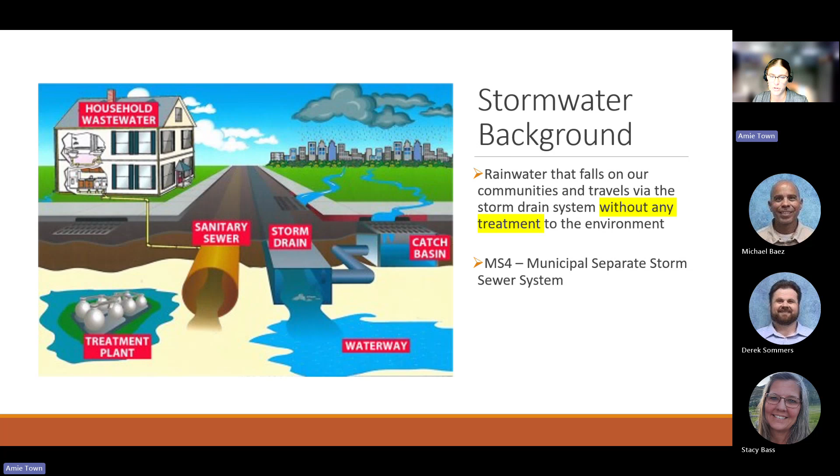The stormwater here in Mesa can flow to a variety of locations, most notably the Salt and Gila rivers, which are protected waters of the United States, which puts a bit more emphasis and regulation behind protecting our stormwater. Numerous endangered and rare species live along these rivers. For example, the Ridgway's rail bird, lowland leopard frog, and the Sonoran desert toad. And there are also agricultural communities downstream that we need to protect.

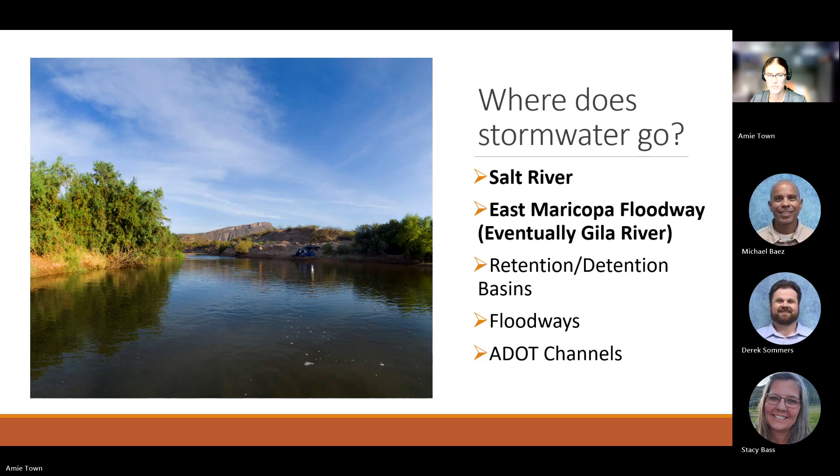There's retention and detention basins, very common in residential neighborhoods and parks, and those are designed to allow stormwater to percolate into the ground, which again creates an avenue where stormwater pollutants can eventually reach the groundwater. There are also floodways and ADOT channels throughout the city where stormwater can flow. So that's why we want to protect the stormwater, but what are we protecting it from? Let's get into the pollutants we commonly see.

Here's a pretty exhaustive list of pollutants that you may interact with or see in your neighborhoods or just out in public on a daily basis, all of which we want to keep out of the stormwater. The automotive and machinery industry has a long history of misusing dry wells as oil disposal drains, particularly in the Central Valley, Phoenix area. Coolants and refrigerants have been found in Mesa neighborhoods, which can easily kill pets and wildlife once discharged. Brake dust and shavings are commonly referenced as the top contributor to lead and copper being found in stormwater.

Trash, litter, dirt, and sediment can cause storm sewer blockages, which in another municipality local to Arizona caused a $1 million cleanup, and that's not something we want to do, so it's important to keep trash, litter, dirt, and sediment out of the system. Pesticides and herbicides are intentional poisons and will kill any aquatic life in the stormwater. Chlorine is a very common pollutant from discharging unneutralized pool water into the streets rather than into your sanitary sewer cleanouts. Fertilizers are typically loaded with nitrogen, which leads to algal blooms and standing bodies of water, and these effectively suffocate the aquatic populations. Paints and solvents will not dilute easily into the stormwater, and those can be difficult to remediate.

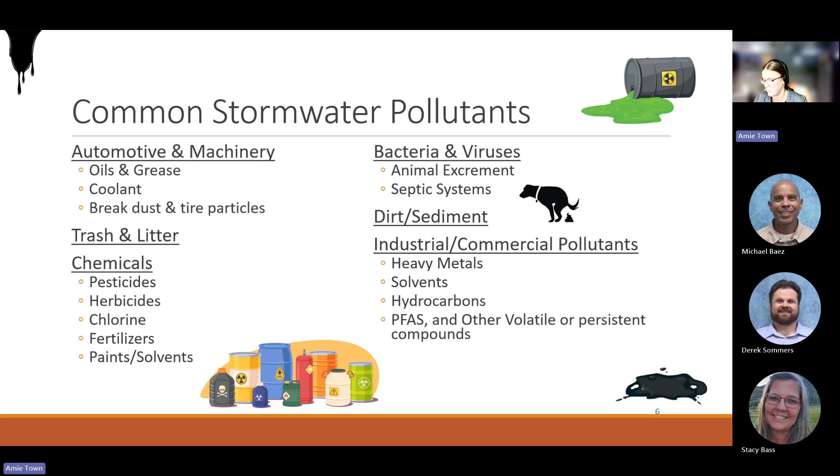Here's a list of where our stormwater pollutants generally come from. We've broken it down into 3 categories: industrial, commercial, and residential. And then there's a general category that everything else kind of falls into. At home in your neighborhood, you might see things like pet waste, yard clippings and chemicals, litter, washout, dumping, and gray water. So you can take a moment and kind of read through all of these pollutant sources.

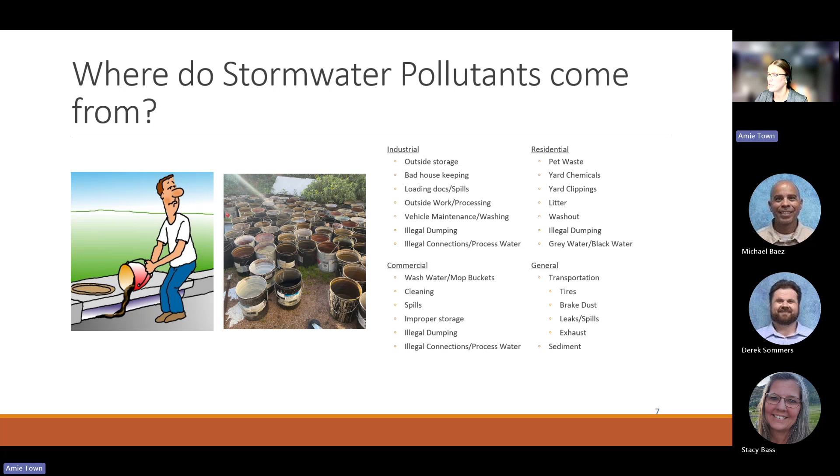The Clean Water Act was the first major federal protection and enacted in 1972. This act mostly regulated industrial discharge pipes that were directly discharging waste and wastewater into rivers, lakes, or surface dumping. While this was a great first step, many revisions and amendments were made, and the amendments made in 1987 introduced regulating stormwater on construction sites, certain industrial sites, and for municipalities.

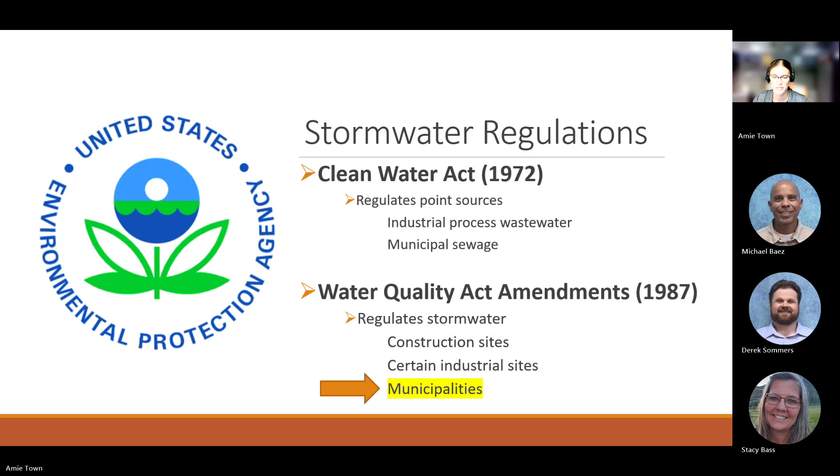Since it's impossible to completely prevent 100% of pollutants from entering stormwater, permits were developed to allow the highest risk areas to discharge so long as they do extra work to minimize the pollutants. This is how we came about having an MS4 permit at the city and maintaining our storm sewer system.

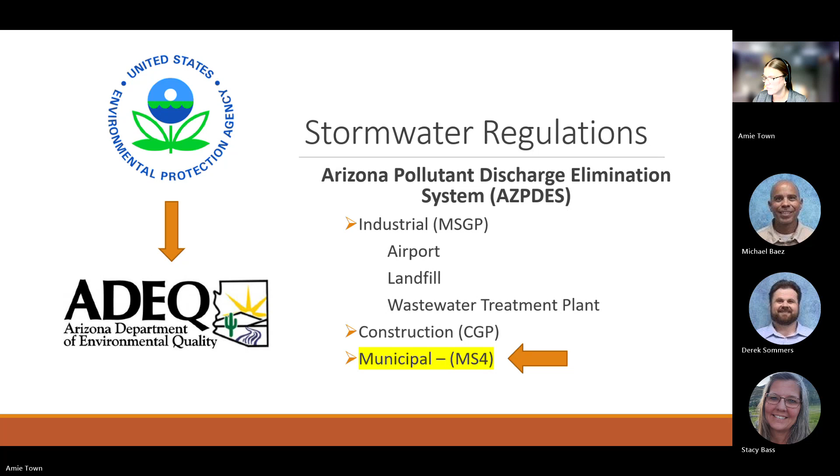There are shorter term permits as well, like the construction general permit for active construction sites greater than an acre in size. There are operating permits like the multi-sector general permit for certain industries requiring additional monitoring and reporting. For example, Falcon Field Airport, which deals with multiple sectors of commerce. Large cities, which include Mesa, have a very robust program that require many different preventative actions.

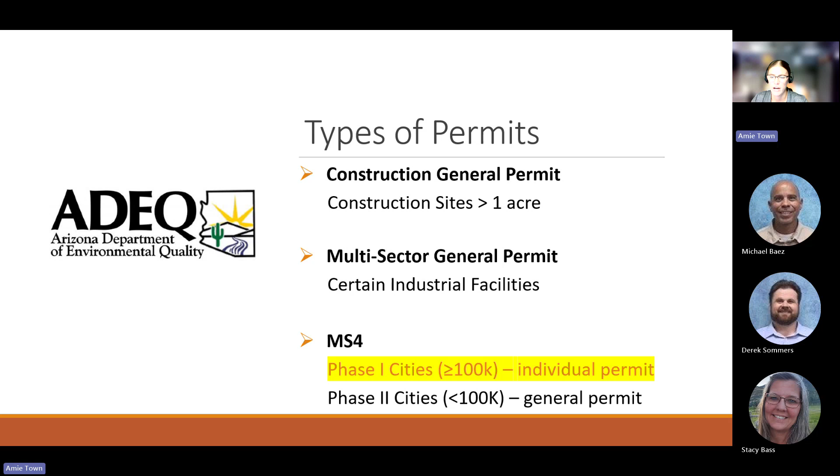MS4 permits are split into 2 categories seen here. Phase 1 cities, which Mesa is an example of, have a population of greater than 100,000. The permits for Phase 1 cities are custom tailored to that city's needs and features, whereas Phase 2 cities with populations of less than 100,000 have a cookie cutter permit that they have to adhere to, and they don't have the opportunity to custom tailor it like Mesa does.

The MS4 permit requires the city to implement many preventative measures, including setting city ordinances, developing system cleaning and maintenance procedures, facility good housekeeping and city employee training, household hazardous waste collection, public education and outreach, industrial and construction inspection programs, illicit discharge investigations, and stormwater monitoring. And most notably, the development of a stormwater management plan, better known as the SWAMP.

Our SWMP requires us to provide citizens opportunities to report complaints, access the SWMP and latest annual report on the city's website, and create opportunities for citizens to participate in stormwater control implementation. These activities may include cleanup events, gutter stenciling, household hazardous waste disposal events, and educational activities.

Many of the outreach and education requirements mandated by our MS4 permit are accomplished through the city's membership in STORM. STORM is an organization made up of many municipalities and government entities within the state. STORM engages in public outreach through both social media and advertising campaigns. They develop and distribute promotional items and educational materials. And they also track and maintain data on the effectiveness of those advertising campaigns. Overall, coordinating with other municipalities like this allows us to better serve both our communities and our neighbors that share our waterways.

Public involvement and participation is another portion of our SWMP, and it's accomplished through several means. We have reporting and tracking tools. I'll post our contact information at the end of this presentation, which you can call or email with complaints. And we have programs designed for tracking complaints and projects.

The Household Hazardous Materials Facility allows for Mesa citizens to responsibly dispose of their potential pollutants for free, as well as recycle usable materials at the swap shop there. If there's still any materials left and it's still able to be used as intended, that's what the swap shop is for, and that can prevent it from becoming another pollution source if it was discarded as landfill waste. Citizens can engage through social media posts, STORM advertising, and live events. And webinars or workshops like this also round out the ways we meet our public involvement and participation requirements.

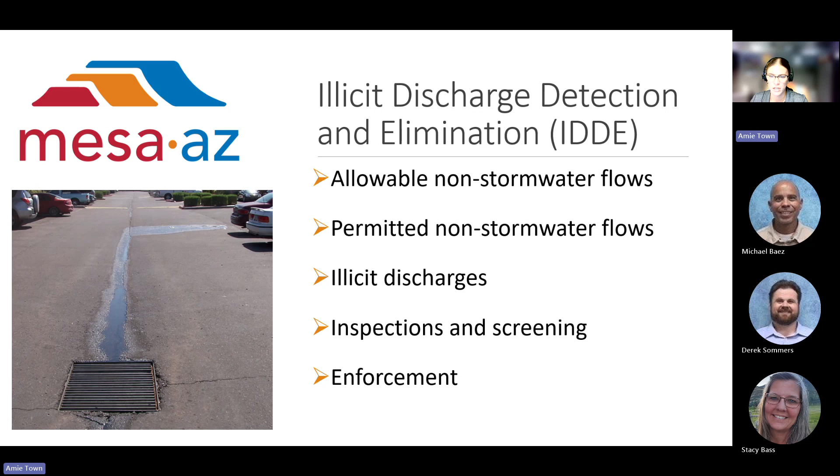Like I mentioned, when conducting these inspections, we expect to see no flow during dry weather screening. However, if a flow is found and can be sampled, a sample is taken to confirm it is an allowable discharge through laboratory analysis, and the site is re-inspected in 24 hours. The city code also lists out all allowable discharges. If you're ever unsure, you can also give us a call, and we would be happy to help.

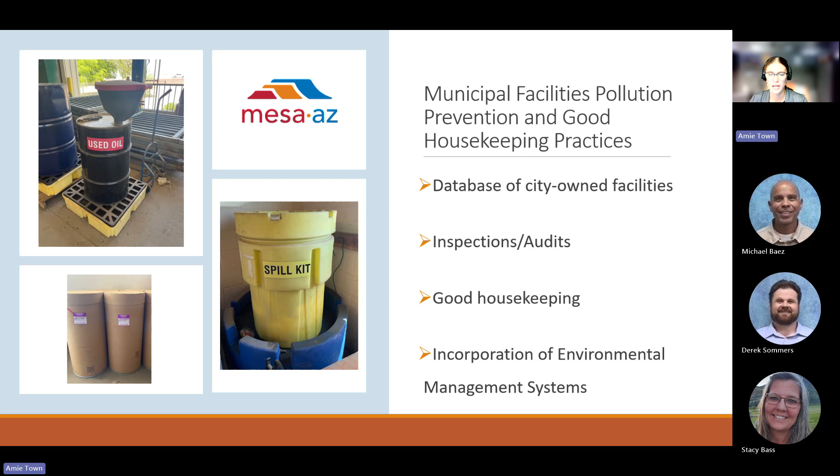Part of our responsibilities include self-inspecting City of Mesa facilities. We keep a record of city-owned facilities and document inspections at least annually for potential stormwater discharge. Some of the things being inspected at these facilities include that containers like drums, cabinets, etc. are closed tightly and only being opened when actively putting materials into the containers. Secondary containment is available as needed. Chemicals are properly separated for reactivity, and all chemicals are properly labeled with labels facing out.

As part of the MS4 permit, the city must also conduct inspections at private industrial and commercial facilities. These inspections must take place at each identified facility once during the 5-year permit term. While on site, our inspectors will review regulatory documents such as their existing stormwater permits, air permits, and stormwater pollution prevention plans. Facilities that don't appear to be meeting their permit requirements are reported as non-filers to ADEQ. These inspections help to resolve and prevent future illicit discharges from taking place within the city.

Construction sites are some of the most inspected by our staff, which take place at least once every 3 to 6 months. Sedimentation pollution can come from vehicle track-out, concrete wash pads, or runoff from material stockpiles. Paints, sealers, coatings, and other wet products are also really common at construction sites and have a high risk of discharging into the storm sewer if spilled or left unattended.

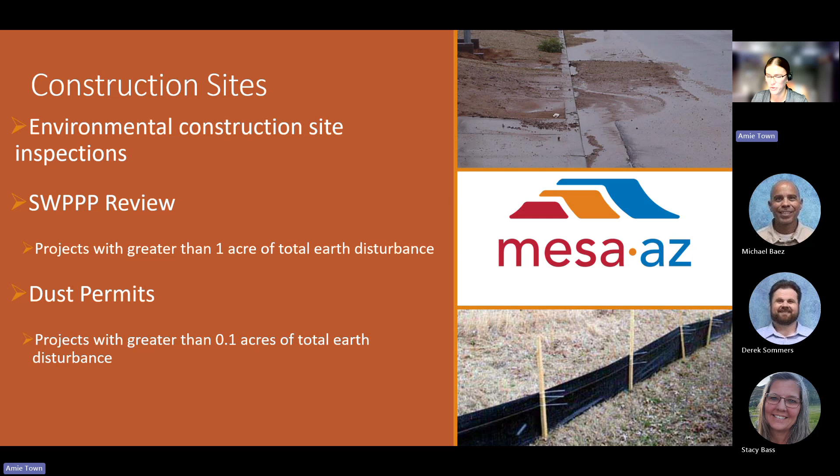A stormwater pollution prevention plan, also known as a SWPPP, is required for construction projects with a total earth disturbance of greater than 1 acre or about 43,000 square feet. All city-owned projects that require a SWPPP must go through a review process with us, the Environmental and Sustainability Department, to ensure all requirements are being met. SWPPPs can tie into dust permits, which could be a whole other workshop itself, but just for reference, projects with greater than 0.1 acre or 4,300 square feet require a dust permit through the county.

Developments are typically required by code compliance to get approval for grading and drainage for on-site retention. Practices as simple as sloping a hill or a sidewalk can have meaningful long-term impact on preventing debris and other pollutants from entering the storm sewer. Having new development standards that require stormwater consideration during both the construction process and the final permanent product is a massive help in preventing and reducing the volume of accidental discharges into the storm sewer for the life of the site. For city facilities, development features like retention basins, valley gutters, and in extremely rare cases, dry wells may be inspected more often than the permit's minimum requirements to ensure they are clean and free of pollutants.

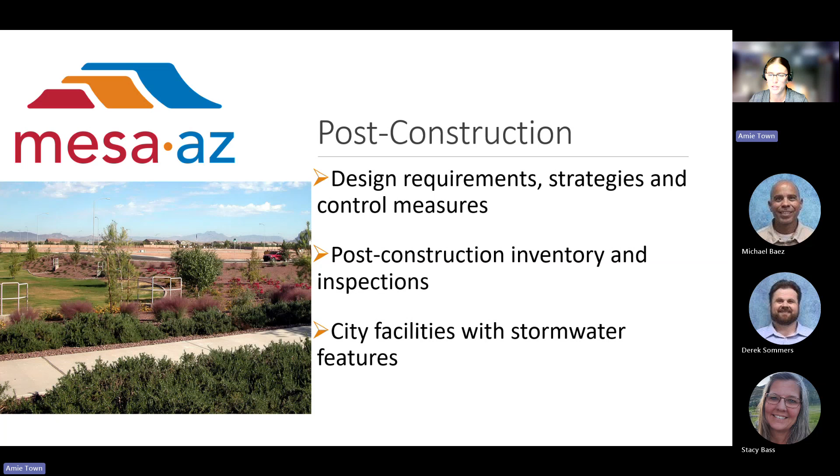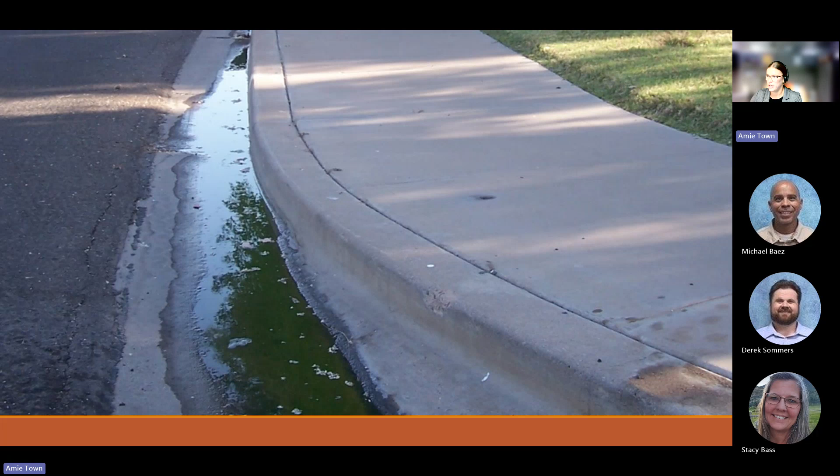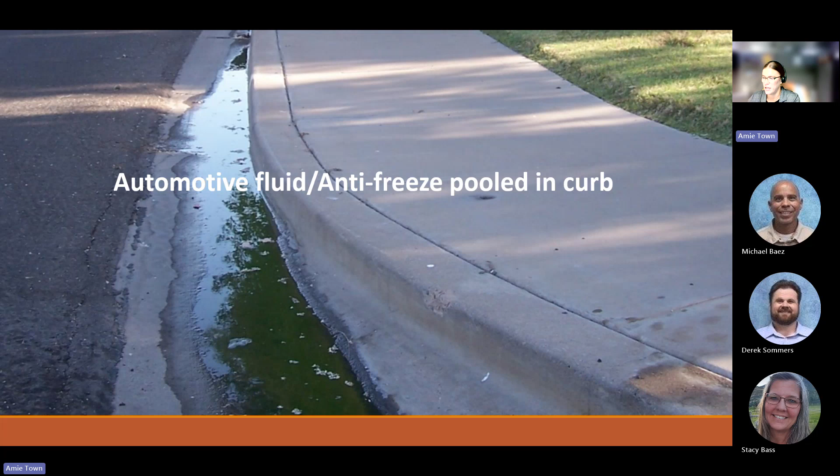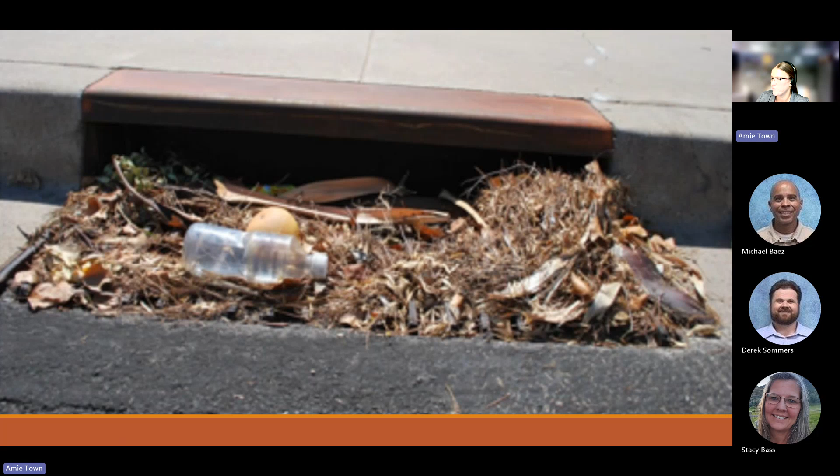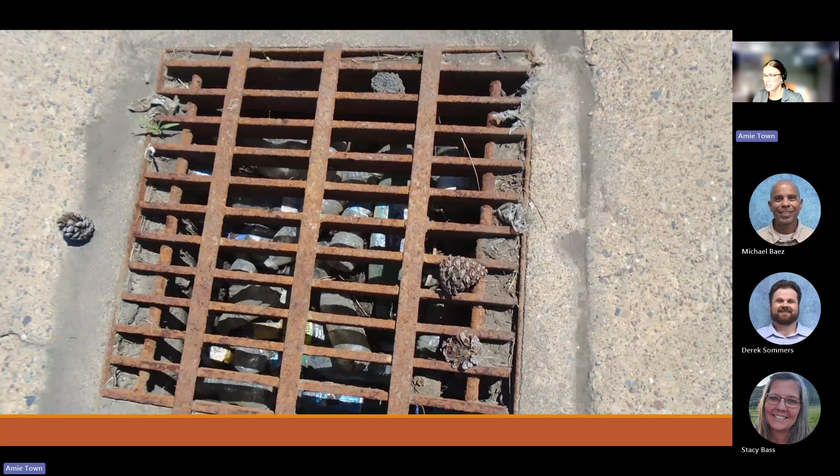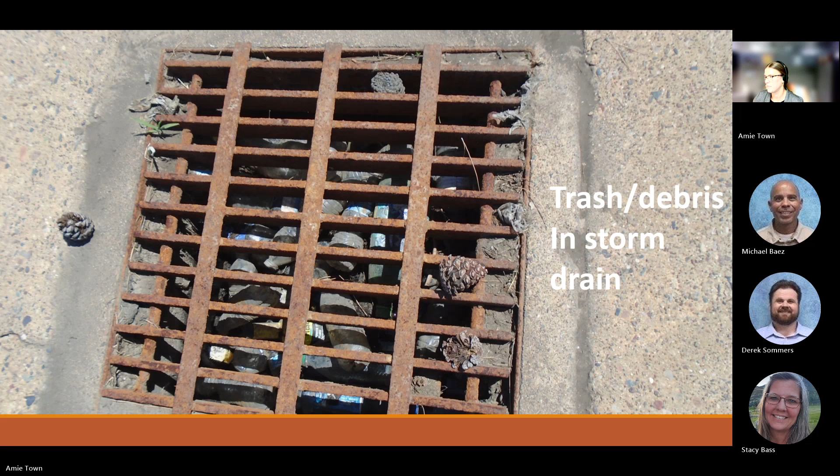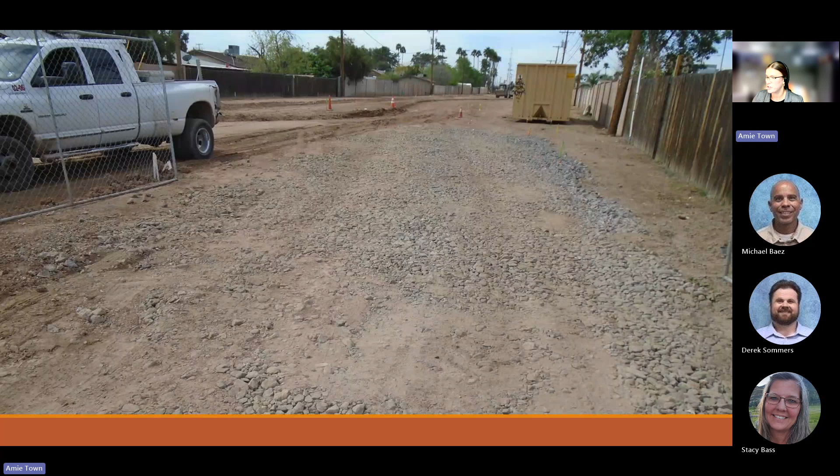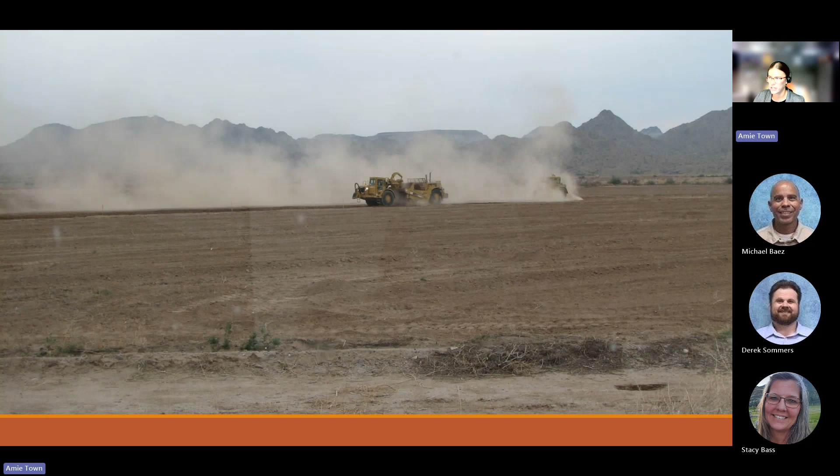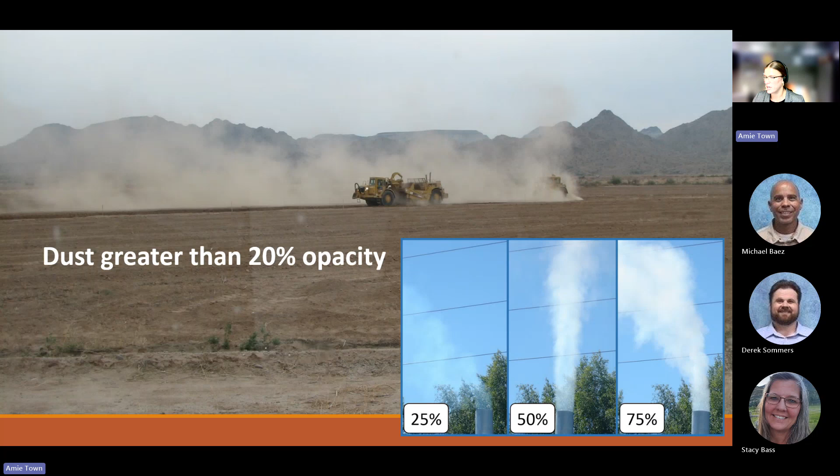And here we're seeing an unmaintained track out pad. Normally these large cobbles are used to knock the sediment off of the vehicle's wheels as they leave a construction site. But here you can see that sediment is kind of caked up on top of that, so it's not going to do anything, and it's going to cause more track out. Here you can see a dust violation. The opacity is greater than 20%, which is what we look for whenever we get a complaint about dust. Everyone in our department here at the city goes through EPA Method 9 training, which teaches us to observe dust in increments of 5% opacity. So we can tell if something is at 20% or if it's at 15%. Here's another example of dust being greater than 20% opacity up here on the top right.

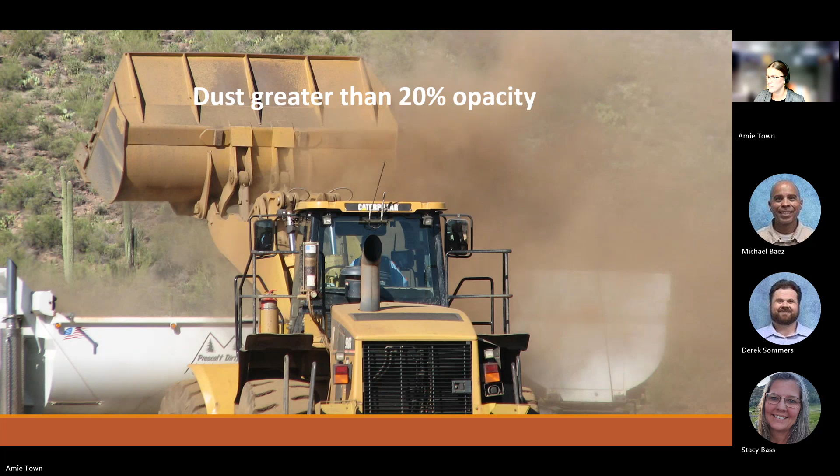And overall, if you see suspicious stormwater dumping activities or if you have any questions, feel free to contact us. That's our general email, environ.info@mesaaz.gov, and our hotline is 480-644-3599.